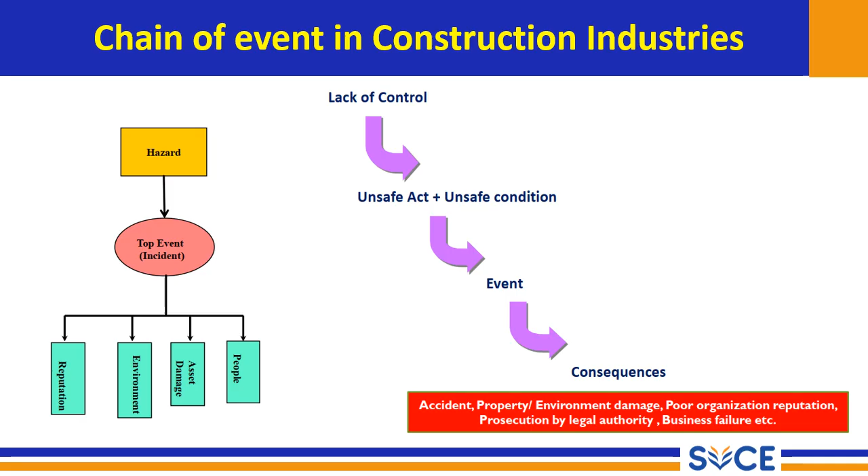Consequences can be nothing, or a minor injury, or a major injury - an accident. Sometimes there will be environmental damage, which leads to poor organizational reputation, affecting the company's business, business failure, etc. These things happen if you don't have proper hazard control in your workplace.

Hazard in construction industries - we are going to discuss different types of hazard that take place in construction.

Classification of hazard, number one: fall hazard. Fall of a person means it can be due to poor workmanship, loss of balance, uneven surface, floor opening, poor work platform, or working at height without using body harness. These are all factors that come under fall hazard. Most of the time people fall from height.

This happens due to improper safety provisions - like not wearing full body harness, or having defective ladders, slippery floors, something like that. They will slip or fall from height - that comes under fall hazard. This image gives an idea of what fall hazard is - fall of a person, whether from ground surface or from a height of 15 or 20 meters, everything comes under this phenomenon.

The next one is fall of materials - due to failure of lifting appliances, tools or tackles, loose materials kept at an edge or height or near floor opening, or poor method of material lifting or shifting. When you shift or lift material inappropriately, the material will fail and fall down on people.

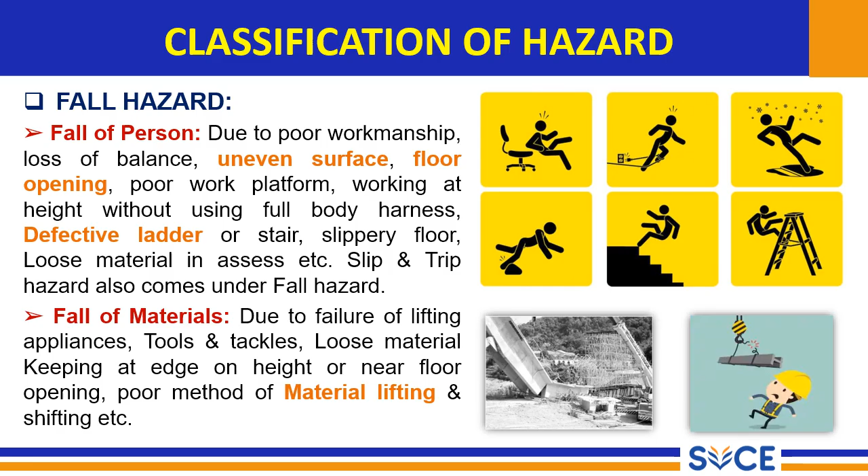People involved in the work - that's an example of fall of materials, falling on your head due to failure of materials or improper lifting of materials.

Next hazard is mechanical hazard, due to entanglement, crushing, shearing, cutting - these are factors under mechanical hazard. If people try to cut material, they might face injury in their hand. When stabbing or puncturing material, the hand or leg gets injured. Whenever they do mechanical work, they get injured while doing it - that comes under mechanical hazard.

From this image you can see crushing - hand getting crushed under material - and entanglement. There's a roller here; whenever you keep your hand here, it will get entangled. Cutting, stabbing or puncture, shearing - these are all things that take place due to mechanical hazard.

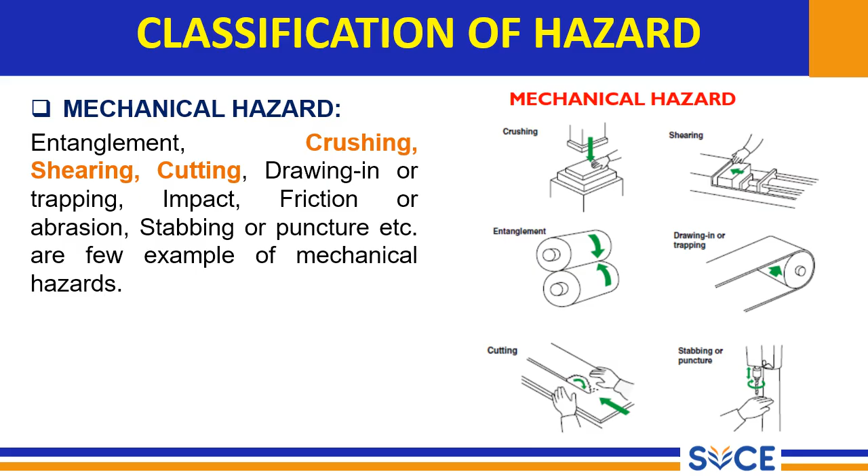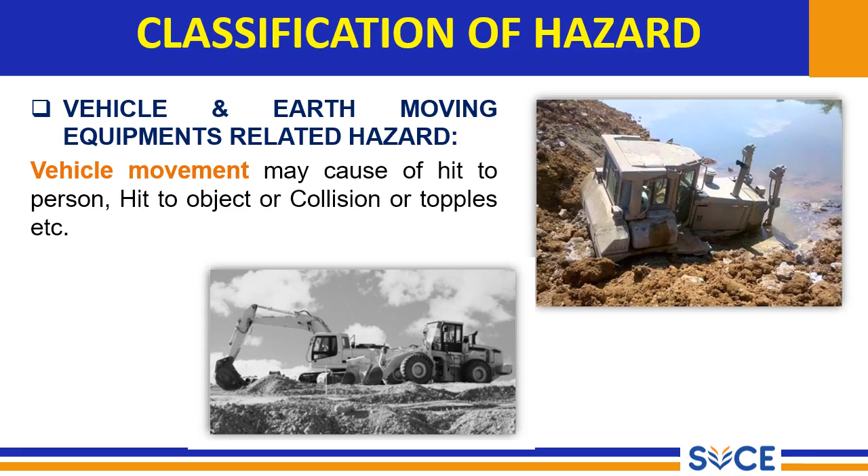Vehicle or earth moving equipment related hazard means whenever you are handling equipment, due to vehicle movement you may hit a person, hit an object, have a collision, or the equipment topples - due to that you get some injury. That kind of hazard is equipment related hazard.

Fire hazard may be due to flammable storage near heat sources, cooking, or other sources that have potential to cause a fire accident, resulting in loss of life or property.

For example, if you are building something and metal is being welded by a person, and he doesn't have proper safety gloves or safety helmet, the fire may affect his hand or skin. That's the kind of fire hazard I'm talking about here.

Or sometimes there will be fire due to electrocution or short circuit at the site - that also comes under this kind of fire hazard.

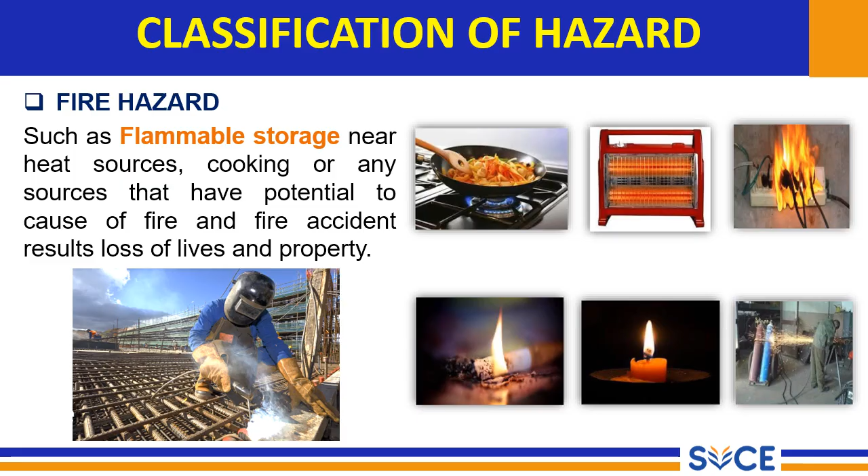Electrical hazard is mainly due to defective electrical tools - electrical wires or plugs used at a site that may be defective or not properly handled. Due to that, damaged power cables or use of non-standard hand tools during electrical work will lead to electrocution, fire, burn injury, eye flash, or fall due to electrical shock. These things happen when you don't practice proper safety precautions at your site.

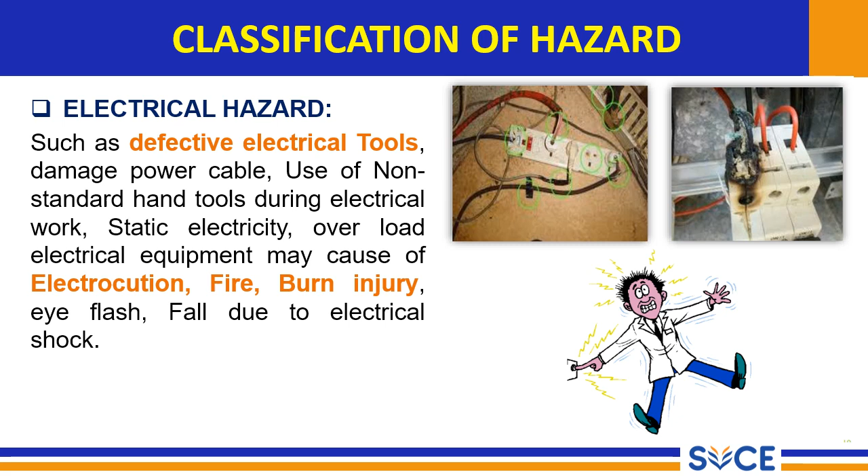There are some other common hazards on construction sites - chemical, physical, biological, and ergonomic. Ergonomic is also one hazard, which will be dealt with in the upcoming lecture.

Chemical hazard examples are gases, toxic gas, vapor, fumes, dust, asbestos, mist, fibers - all of these cause problems to people involved in work. Examples include acid, alkali, or asbestos. When you try to clean a material, sometimes dust gets into your body, and due to that dust you get health issues - that is the chemical hazard I'm talking about here.

Physical hazard means it may be due to temperature, noise, vibration, or ionizing radiation. All those things come under physical hazard. Examples are laser and handheld power tools. Whenever you use handheld tools at a site, for example a drilling machine, it has heavy vibration, so your hand gets some kind of issue while doing the work. You get health issues related to vibration. That comes under physical hazard, where you're doing something physically and experiencing something.

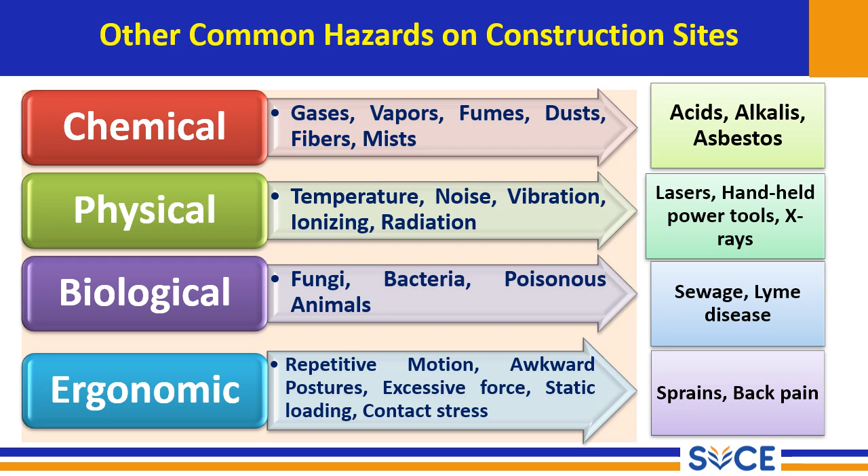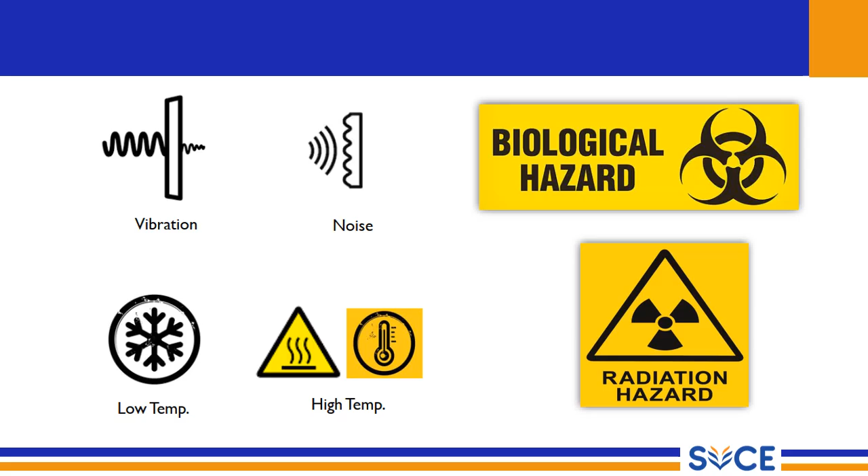This is another example of biological hazard, the symbol we usually see at our construction site. Whenever there is vibration, noise, high temperature, or low temperature, we used to see this kind of symbol.

So how do we control hazards at our construction site? There is a method called EISEAP: E stands for eliminate, I for isolate, S for substitute, E for engineering, A for administrative, and P for PPE. These are different methods you can follow, where the most effective method is the eliminate option, where you completely eliminate the hazard. If you can't eliminate it, you can isolate it by putting a temporary barrier, with signs like 'do not operate' or 'do not go', so people are alerted and can't enter a particular zone.

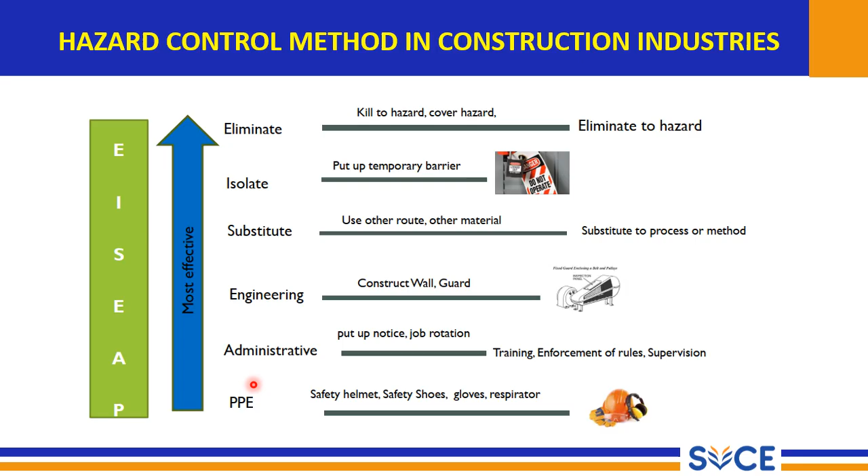The last option, though least effective in its own way, is PPE, personal protective equipment, meaning you should provide safety gloves, respirator, shoes, helmet, etc. to the laborers. It's not that because we eliminated the hazard we can't provide PPE, even if you eliminate it, you still provide PPE. Laborers must be educated about what kind of PPE to wear for each activity. For concreting, you should wear safety shoes and gloves. A helmet is compulsory for any work inside the construction site, because at any time an object can fall, so helmets are very compulsory for laborers. This is one method to control hazards in the construction industry.